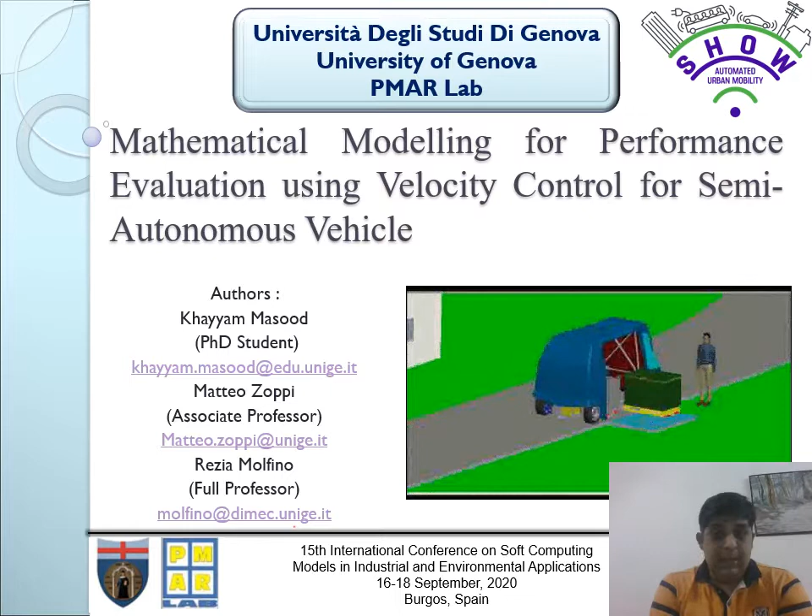My name is Khayyam Masood, and today I will be presenting my paper, Mathematical Modeling for Performance Evaluation using Velocity Control for Semi-Autonomous Vehicles, for the 15th International Conference on Soft Computing Models in Industrial and Environmental Applications, SOCO 2020, which is being held in September 2020. So I'll just jump into the presentation right away.

I'll first introduce myself and the university, and then I'll give a little summary about the paper, a little bit about the vehicle, and then the mathematical model we made and the velocity controller we made for it. And finally, I'll come to the simulation and results, and finally to the conclusion.

So, about the university, we belong to the University of Genoa, which was founded in 1481, and it's located in Liguria, Italy. It's a very big university consisting of more than 32,000 students and 2,500 staff members. It has schools, and within those schools there's a polytechnic school which has a department, DIMEC, which is our department, and within that department is our lab, which is PMAR lab. If you want to know more about us, visit our lab on the given web.

So there are basically three authors. I'm doing my PhD from École Centrale de Nantes, France, and University of Genoa, Italy. I've got more than 15 publications and a lot of experience under my belt. And then there's my professor Matteo Zoppi, who has done his PhD in robotics. Finally, there's Rezia Molfino, who's also a full-time professor and is a renowned name in our industry.

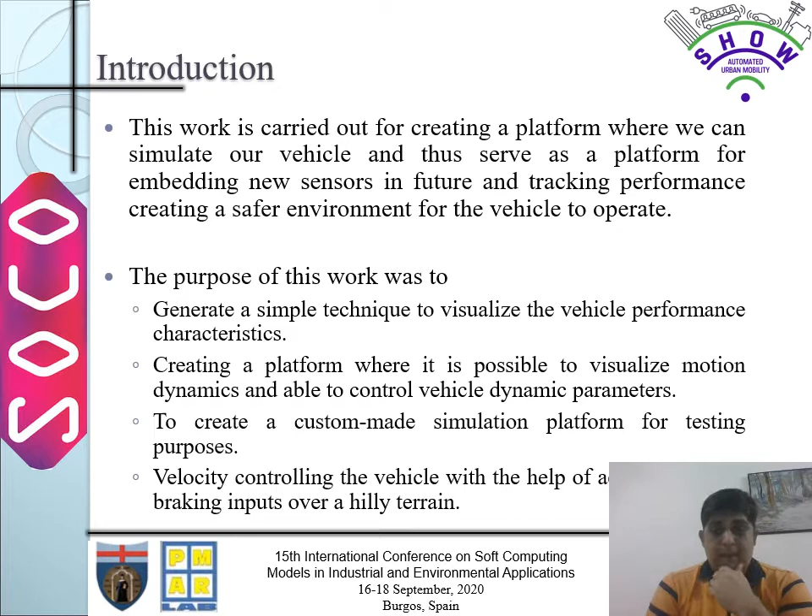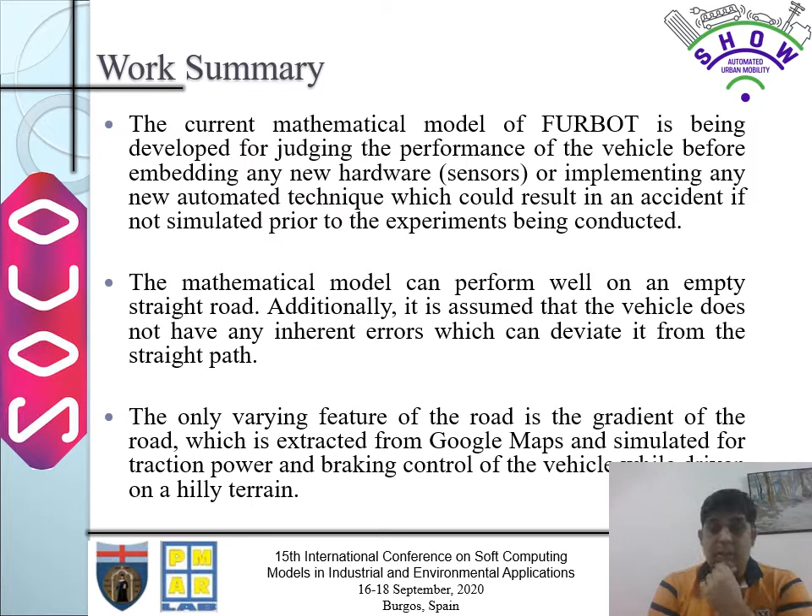And so what about our work? Well, in this work, we have basically made a mathematical model for judging the performance of the vehicle. That is required for embedding any new hardware we wish to embed in our system. The mathematical model is pretty straightforward. Right now it's on an empty straight road, and it assumes there's no inherent error in it. The only varying factor from the environment is the elevation profile, which we got from Google Maps.

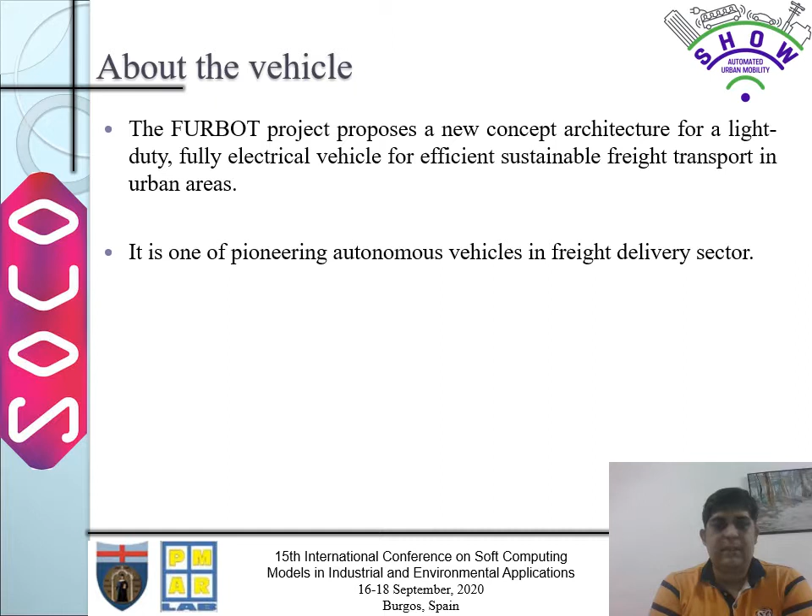So about the vehicle. Well, the vehicle is a new concept, and it's a light duty, fully electric vehicle, and it is envisioned to be used for efficient, sustainable freight transport in urban areas. It is one of the pioneering autonomous vehicles in the freight delivery sector, and it is expected that it will be performing autonomously in the European H2020 project SHOW, Shared automation Operating models for Worldwide adoption. If you want to know more about the vehicle or the project SHOW, you can visit these websites given below.

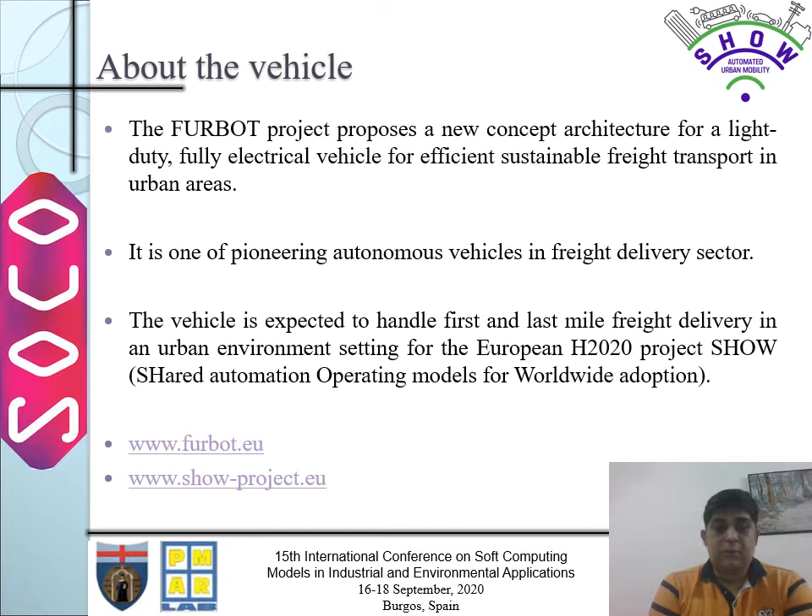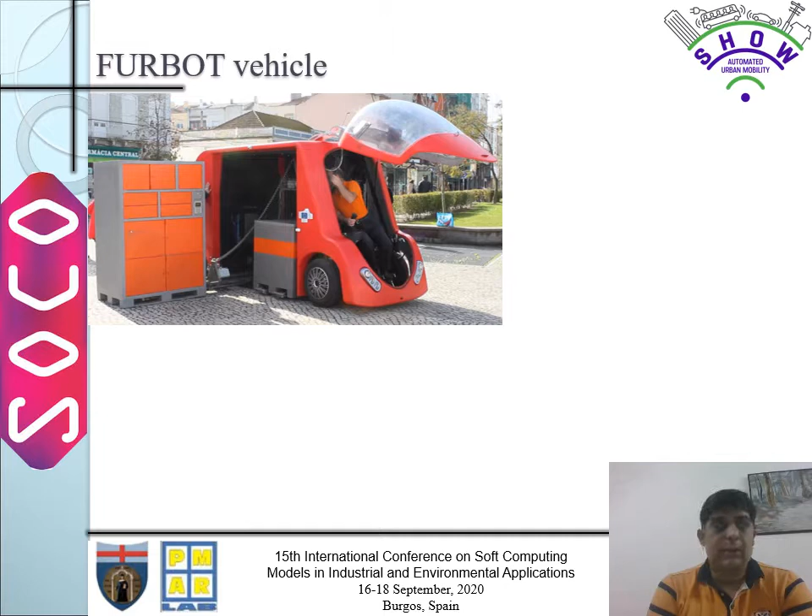This is how the vehicle looks in real life. It has two forklifts, and the cargo goes from the right hand side. There's a pilot which drives the vehicle, but it is a vision that the vehicle will be fully autonomous by the end of October 2021, by the end of next year, hopefully. We are working on it, and this work is basically for that purpose. This is another diagram, a CAD diagram of the vehicle.

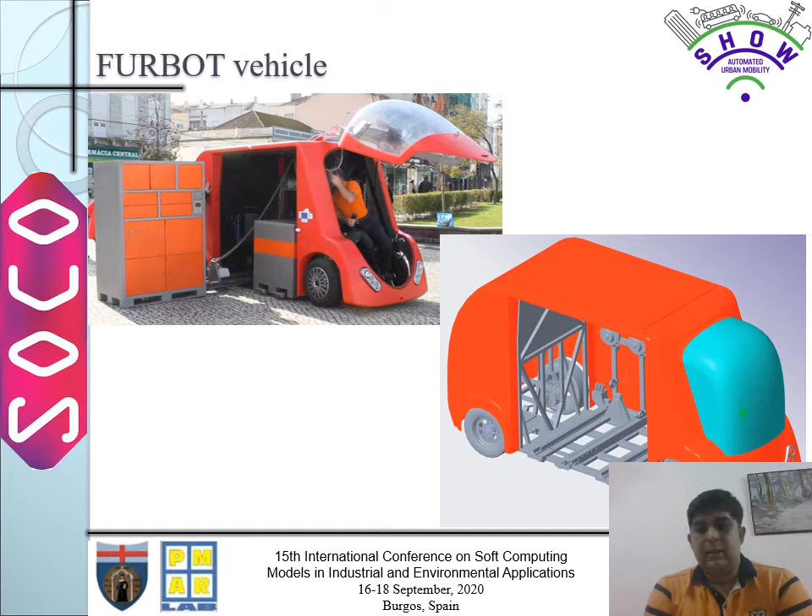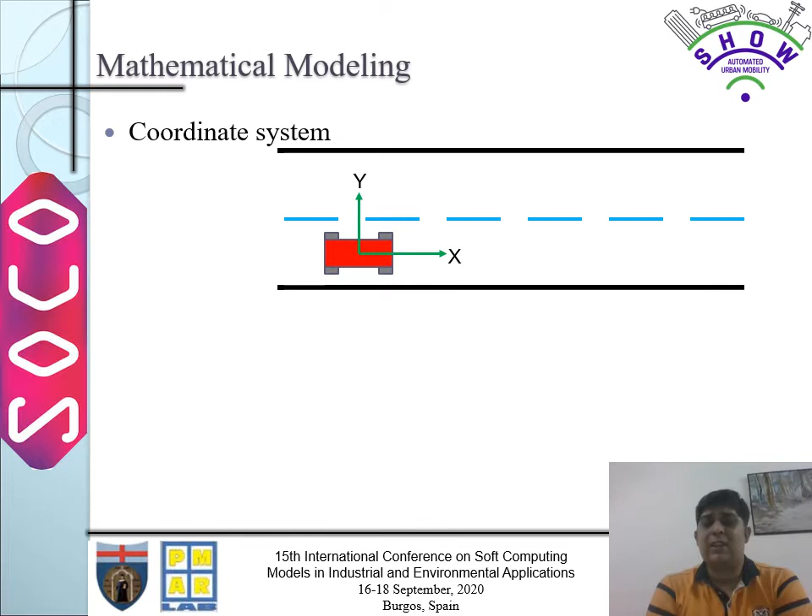And so coming to the mathematical model, our coordinate system is pretty straightforward. The x-axis is along the nose, the y-axis is from the left-hand side, and the z-axis is from the top. The constraints are pretty straightforward as well.

The vehicle is unable to roll and move along the z-axis, and the motion of the vehicle is along a straight line. There's no traffic or obstacles in the path of the vehicle.

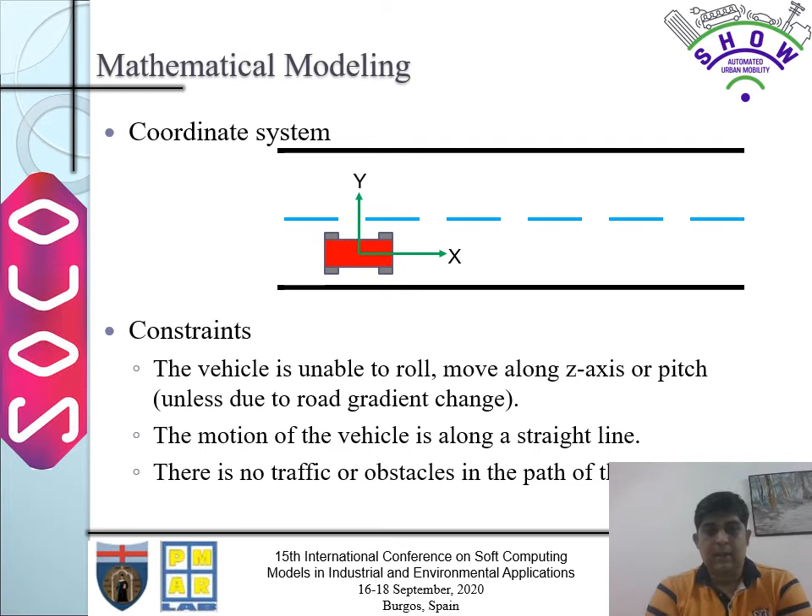So in the mathematics, we have used four different types of forces which are acting on the vehicle. The traction force, which is basically generated by the engine, so that is the propulsive force for our vehicle. Then there's drag force. Then there's gradient force, which is due to the gravity and slope of the road, and alpha in that denotes the slope of the road at that particular instant.

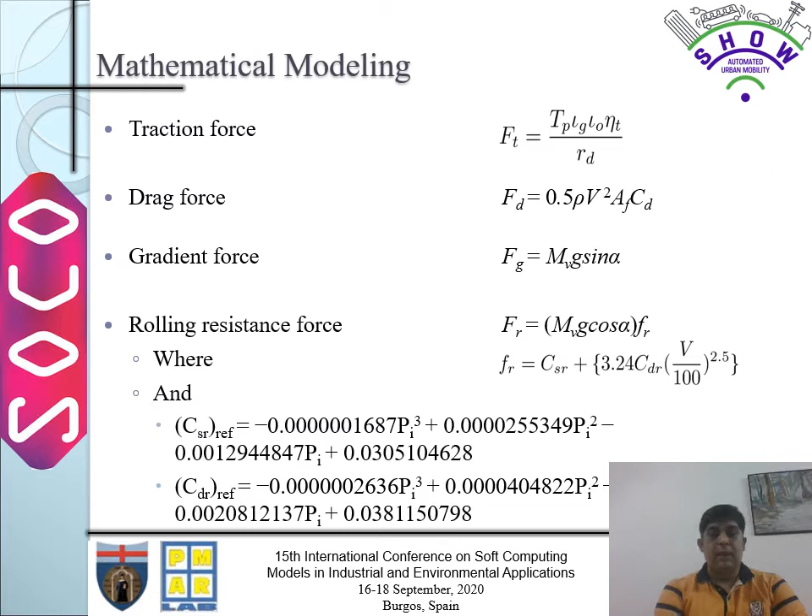Rolling resistance force, which is basically frictional force, is derived from the formula. In that, there are different formulae for calculating the coefficient of friction, and that's pretty much it.

So the longitudinal equation of motion, the lateral equation of motion and the moment along z are in the format given below. But since there's no steering angle, this component goes to zero. There's no velocity along the y-axis because there's no deviation from the path, so this component also goes to zero.

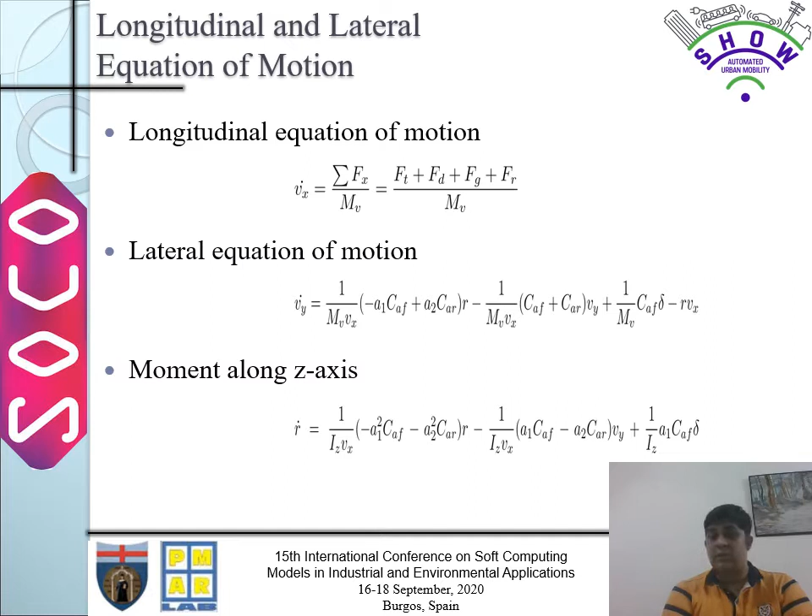And since there are no inherent errors, there's no moment, so the yaw rate also goes to zero. When these all go to zero, our r is always zero. When r is zero, the terms in this and this go to zero, and because there's no Vy, this force goes to zero, and there's no steering angle involved, so this portion also goes to zero.

So there are two separate controllers for our cascade controller. We have made a cascade controller because the requirements for braking are different from the traction power control: we might need sudden braking, but we will never need sudden acceleration, which can rev up the engine. So the best thing was to make a cascade controller.

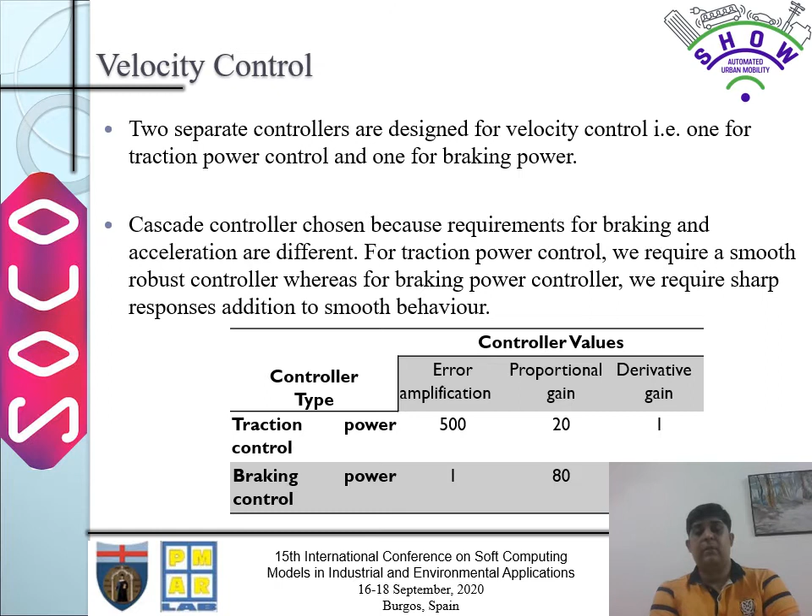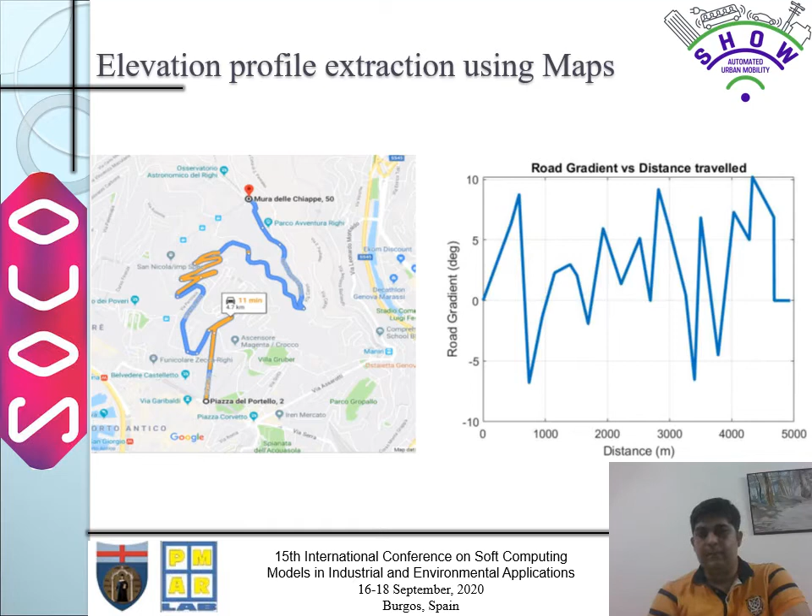So to simulation and results. We used Google Maps and extracted elevation data from Google Maps. On the left-hand side, we took a profile in Genoa along which the vehicle went, and we extracted the elevation profile, which is plotted. We tested over both of the controllers.

The braking controller had a dead band of 1 km per hour. That is, the braking will not be initiated unless there's an error of at least 1 km per hour. So that's why you see these two peaks, which are more than 1 km per hour, because only once the threshold is crossed is braking applied. Because of the slope of the road, the vehicle accelerates more than the reference.

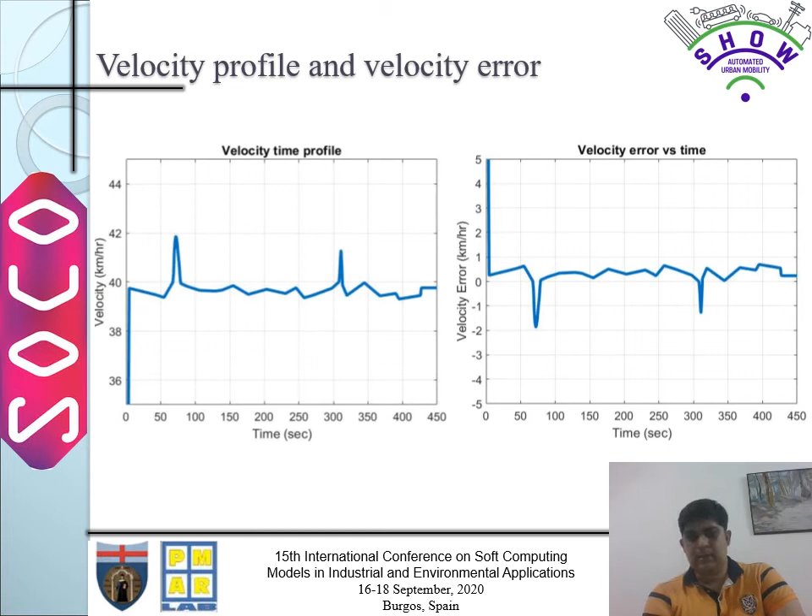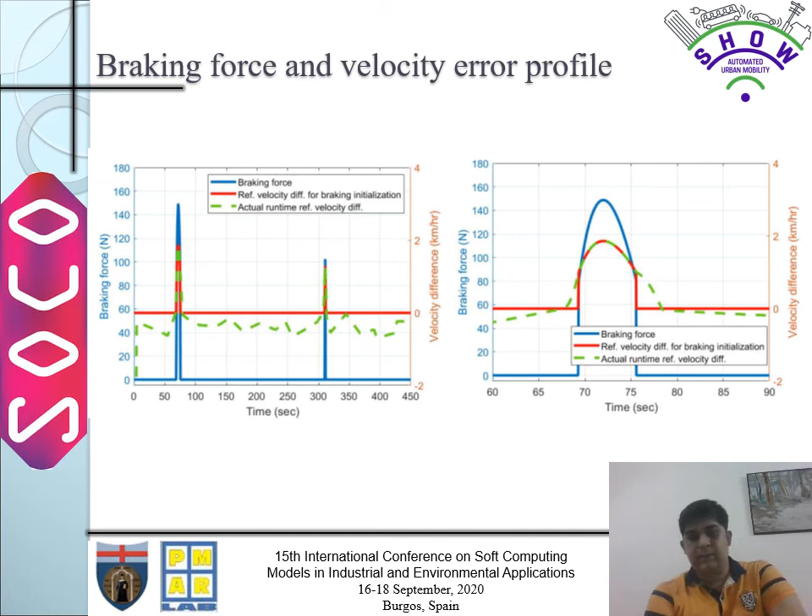Regarding the braking force, as I've mentioned, the right-hand y-axis is for the velocity difference and the left-hand side is the braking force. As you can see from this figure, braking is only initiated when there is a difference of at least 1 km per hour, and as soon as the difference drops below 1 km per hour, the braking force is also diminished. That is, we have taken our foot off the brakes.

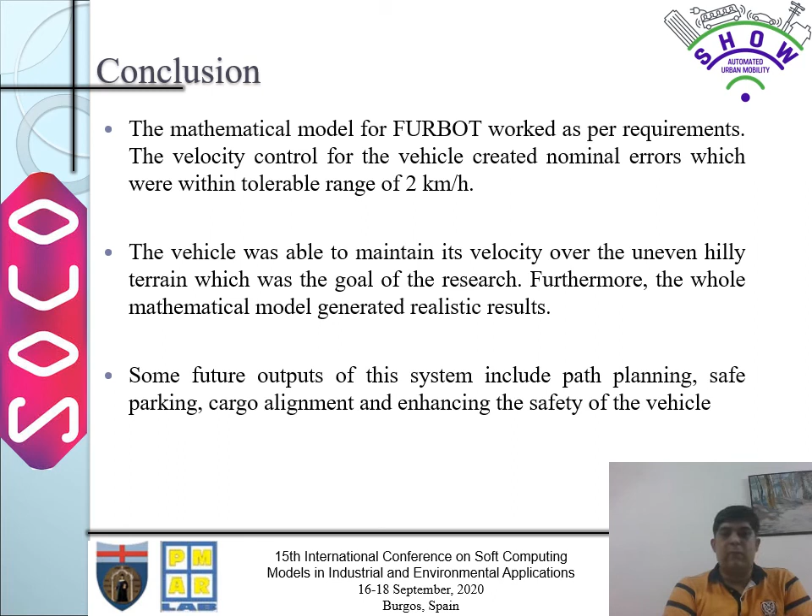So the mathematical models work as per requirements. The velocity control remained within the desirable range of 2 km per hour. The vehicle was able to maintain its velocity over a hilly terrain, which was required. For future aspects, this platform will be used for path planning, safe parking, cargo alignment, and enhancing the overall safety of the vehicle.